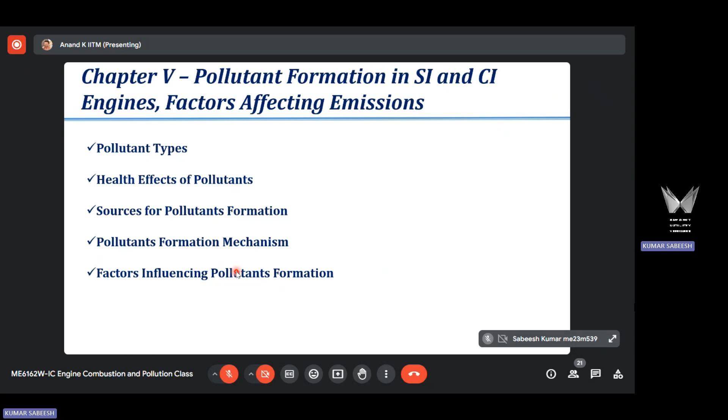They are also called regulated pollutants. We need to reduce the concentration of these pollutants emitted into ambience because they create health effects. So we have so far discussed the factors that affect pollutant formation in spark ignited engine. In the last class, I started my discussion on the factors that affect pollutant formation in CI engine, compression ignited engine. I will continue that now - these are the variables, engine design and operating variables that affect pollutant formation.

Design variables need to be carefully optimized when designing the engine. In a compression ignited engine, we have to control four regulated pollutants: NOx, particulate matter, HC and CO. In NOx, we have both NO and NO2, unlike SI engines where NO2 concentration is negligible. Here it can go up to 30%. So we need to control these species emitted from the engine.

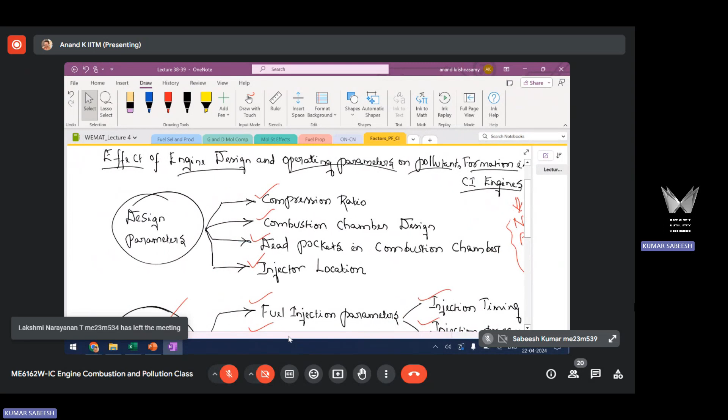That's why we need to look at the variables that have an influence on these pollutants, so as to carefully optimize them such that pollutant levels are less in the engine. That is our objective. When we analyze the effect of these variables on pollutant formation, we have to recollect the mechanism involved in forming this pollutant, which we have already discussed. We need to relate how a particular variable affects the mechanism for a particular pollutant. That is how we analyze the effect of these variables on pollutant emission.

When you talk about compression ratio, it's an important design variable. As we know, it affects performance as well as pollutant emission. Here we are looking at how it affects pollutant emission in a typical diesel engine. Compression ratio, for a CI engine, varies anywhere between 14 to 22. That's the normal compression ratio range for a CI engine. We need to carefully fix a particular number based on a given CI engine.

CI engine is most versatile, as we have seen. You have a large application segment for CI engines. Based on the type of application and type of CI engine that we handle, we need to carefully optimize this. Now let us look at how this affects pollutant formation.

Let us consider that we are increasing compression ratio. If we increase compression ratio, what effect will it create on the combustion process?

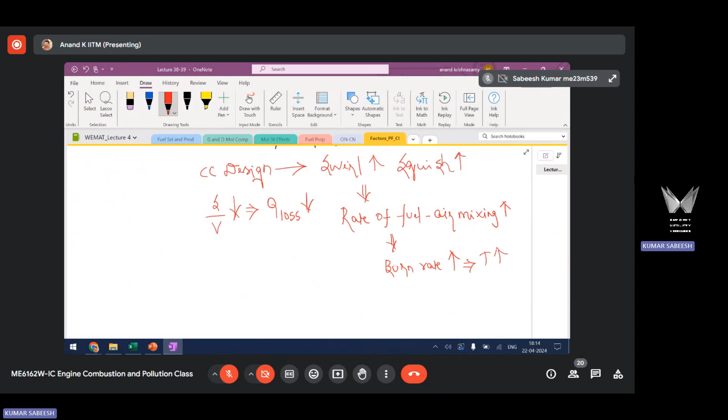When we talk about heat loss here, we are talking about wall heat transfer losses - that is the heat loss from the engine cylinder to the coolant. It's also called wall heat transfer loss, and it's a function of surface to volume ratio. So when you reduce surface to volume ratio, heat loss is less. When heat loss is less, what happens to in-cylinder temperature? It goes high.

So you can see that the overall objective of combustion chamber design in a CI engine is to increase the burn rate and increase mixing - that raises the temperature. You also retain a lower surface to volume ratio from the perspective of increasing thermal efficiency and reducing heat loss - that will also increase temperature.

So this rise in temperature in the cylinder will reflect in the primary pollutant levels. NOx, or NO, will increase - thermal NO will be high. What about the other pollutants? What will happen to soot? It will decrease, because oxidation will also increase. It will decrease for two reasons - one, improved oxidation with higher temperature.

Any other effect because of better mixing in terms of soot formation? Can I say fuel-rich regions reduce due to better mixing? So you are increasing swirl and squish - this results in better air fuel mixing. Can I say that this will reduce local rich regions? Yes - so the overall effect will be fuel-rich regions are less, temperature is high.

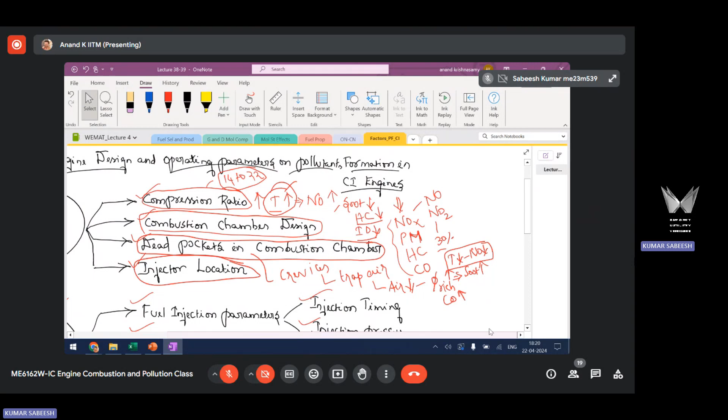The other design parameter which is relevant only for CI engine application is injector location. When I talk about injector location, you can locate the injector in different ways. I will show you 4 possible ways wherein you can locate the injector. So this is one option.

So you can mount the injector with any of these options. Option 1, you are mounting the injector along the axis, so it is a centrally mounted injector. Second one, you have an offset injector - injector is away from the axis, that is case 2. Case 3, it is centrally mounted, but you have an angle.

Now, among these 4 options, which one will you prefer and why? I'm posing this question to you - which one will you prefer and why? Option 1 is preferable, sir, for the spray cone angle to be sufficient. So all of you agree that option 1 is preferable?

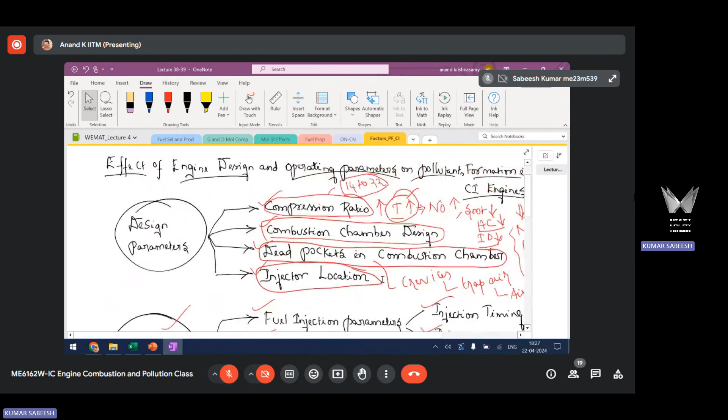Okay, so next we are checking the operating variables. You have 4 important operating variables in a diesel engine. Among these, I would say option 1 is the most important variable. Load and speed are out of your control. You need to run the engine based on different load and speed.

But the first one, you need to carefully optimize. This operating variable needs to be optimized dynamically when you are running the engine. That's why you need a closed loop control system in place. This system will get signals from the sensor and has to dynamically optimize the injection parameters such that the primary pollutant levels are less in the engine.

Two important injection parameters are: one is fuel injection timing, and the second is pressure. These two are controllable if you have an electronic injection system, and cannot be controlled if you have a mechanical system. Mechanical systems don't have any flexibility in varying the injection parameters. That's why we need CRDI, Common Rail Direct Injection System.

Almost all on-road vehicles use CRDI systems. We don't use mechanical systems, except in off-road stationary diesel engines. We generally go with flexible electronic injection systems in diesel engines, which means you can vary the timing and pressure.

Now let us look at the effect of injection timing and pressure on pollutant levels. When I talk about timing, you have 2 options, with respect to TDC, where you are spraying the fuel. You can either spray it far away from TDC, which is advanced injection timing, or closer to TDC, which is retarded injection timing.

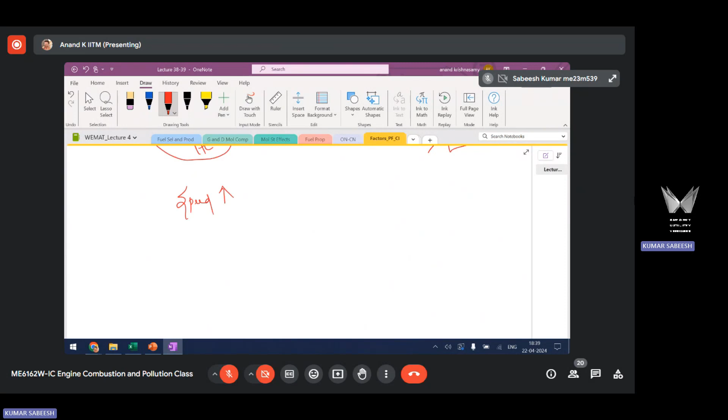Next we have speed. When I say I'm increasing speed, basically the turbulence level in the engine will be more. Swirl and squish air motion inside the cylinder is going to be higher. So higher the engine speed, turbulence increases, it's a function of engine speed. So air motion in terms of swirl and squish is going to be high. This will reflect in higher burn rate because it reflects in better mixing.

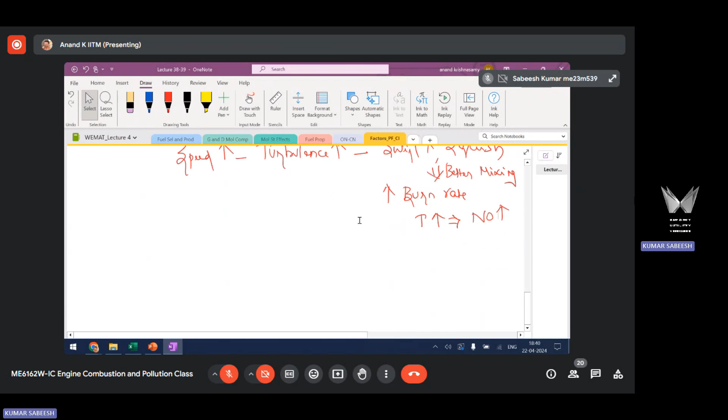Higher burn rate means the temperature will increase at higher speed. Higher temperature will reflect in NO, high levels of NO. Higher temperature will also improve oxidation rate of soot, CO, and HC, so they may come down. But you should also note that with increase in speed, the time available for all this will come down. Engine running at higher RPM means engine cycle time will be less, so the time available for oxidation of HC, CO as well as soot will come down.

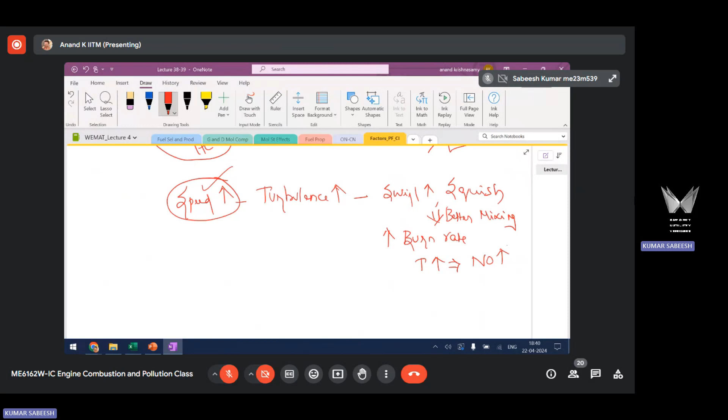So there are two contradicting effects here with speed: the time is less, the temperatures are high. Due to high temperature, the oxidation rate is high. So the overall final value of HC, CO or soot is dependent on the magnitude of the speed. But NO you can say is going to be high with increase in speed because of better burning and higher temperature.

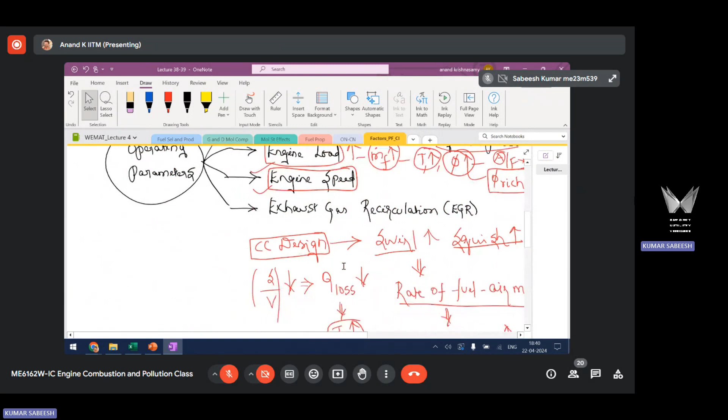Next we have exhaust gas recirculation. This can also be optimized. I will talk more about exhaust gas recirculation in the next chapter when we discuss pollution control. What we are doing here is recirculating a fraction of exhaust gas back into the intake manifold. This is exhaust. So you are recirculating exhaust gas. This is the intake manifold, this is the exhaust manifold. So when I say I'm recirculating exhaust gas, I'm tapping a fraction of the exhaust gas from the exhaust line and sending it back to the intake line.

In the intake line of a diesel engine, you are inducting only air, and fuel is sprayed inside the cylinder. So exhaust gas is mixed with air and sent into the engine cylinder. Now if this is the case, what will be its effect on the combustion phenomena? Two important effects: one, temperature will come down; second, oxygen will come down. Oxygen comes down due to the displacement effect, because exhaust gas is displacing a considerable fraction of air in the intake system.

That's why you have less air going into the engine. This is the displacement effect or dilution effect. Oxygen levels will come down. Temperature will come down because of the constituents of EGR, exhaust gas. You primarily have CO2 and H2O, complete combustion products in the engine. These are triatomic gases with high specific heat. When the specific heat is high, the temperature will come down. This is called the heat sink effect. It won't allow the combustion system temperature to rise. The higher specific heat component will absorb the heat and won't allow combustion temperature to rise. That's the reason for the drop in temperature. So this is the overall important effect of recirculating exhaust gas into the intake manifold. Now you can comment on what will happen to the primary pollutants.

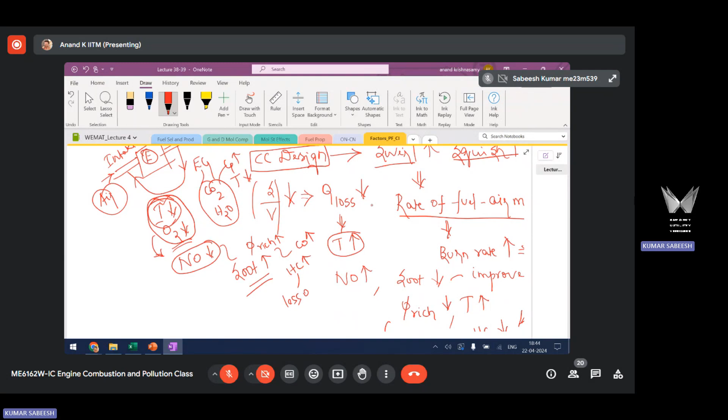But there are other effects. Soot will be high, there will be a trade-off, because for the same reason of less temperature and less oxygen, the oxidation rate of soot will be less. Less oxygen also means fuel-rich regions increase inside the cylinder, so soot will be high with exhaust gas recirculation. For the same reason, CO is also high because of insufficient oxygen in the cylinder. Similarly, HC will be high primarily due to the temperature effect - lower temperature means less oxidation, and less oxidation leads to high HC levels. So this is the effect of exhaust gas recirculation: by recirculating exhaust gas, you effectively control NO level, but the other three primary pollutants will increase.

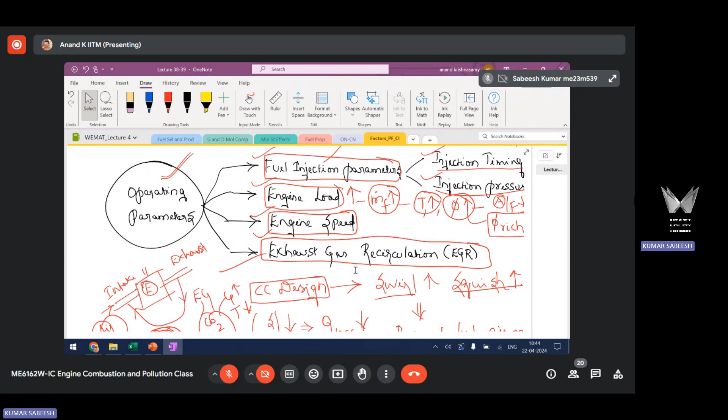This is similar to valve overlap in the SI engine, right? Yes, I will talk about valve overlap in the next chapter. A similar effect is there - by retaining residual gas, whatever effect you have, the same effect will be there when you recirculate exhaust gas. In fact, residual gas and exhaust gas are the same product, combustion product. You have different terminologies based on how it is retained in the cylinder.

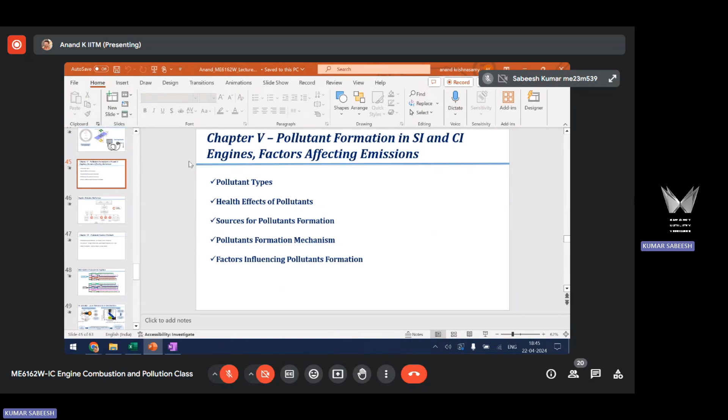So with this, I conclude chapter 5. Now I am moving to chapter... chapter 5 is concluded with that. Now we are moving to the next chapter in the second module, chapter 6, which is about pollutant control methods.

These are the contents we are going to discuss in this chapter. So far in the previous chapter, we discussed the mechanisms involved in forming primary pollutants and the factors that influence pollutant formation, primary pollutant formation, in SI and CI engines. Now with that understanding, we are going to look at the available control methods. This is very important to learn because you need to control the pollutant level below the legal mandate. There is an emission mandate which is a legal requirement, otherwise you cannot sell the vehicle on the market. Any new vehicle cannot be launched until the legal emission requirements are met. So we have to control the pollutant level below the legal limits, and we should be familiar with the control methods available. Before we discuss control methods, it's very important to learn the mechanisms upon which the pollutants are formed and the factors that affect or influence pollutant formation.

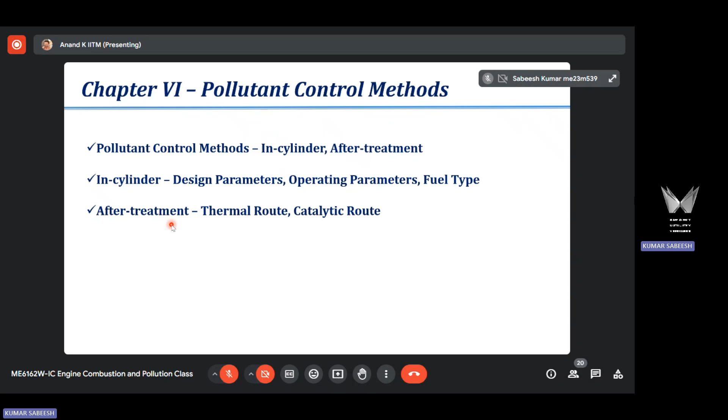So with the understanding of those mechanisms and factors, we move to looking at the control methods. These are broadly classified into two types: one is called in-cylinder method, the second is after-treatment method. In-cylinder method targets reducing pollutant level in the cylinder itself - as the name implies, we reduce pollutant levels inside the cylinder. Whereas in after-treatment control, we don't bother about how much pollutant is formed in the cylinder; rather, we control the pollutant level in the tailpipe or engine exhaust pipe. Pollutant concentration is reduced in the tailpipe before the pollutants are let out into the atmosphere - that's why it's called after-treatment. You are not controlling the formation of the pollutant, rather you allow it to form, and after the pollutants are formed, you control it. So I will give more detail about the available in-cylinder control options and after-treatment control options to reduce pollutant levels from SI engines and CI engines. This is what we are going to look at in chapter 6.

Before we discuss in-cylinder and after treatment control methods, let us have a quick look at the exhaust gas condition. It's important to know the exhaust gas condition in SI engine and CI engine before we talk about these controls, especially for after treatment control, where it's important to learn the difference between the exhaust conditions in SI engine and CI engine. That's why I'll give an overview of exhaust gas condition before discussing control methods.

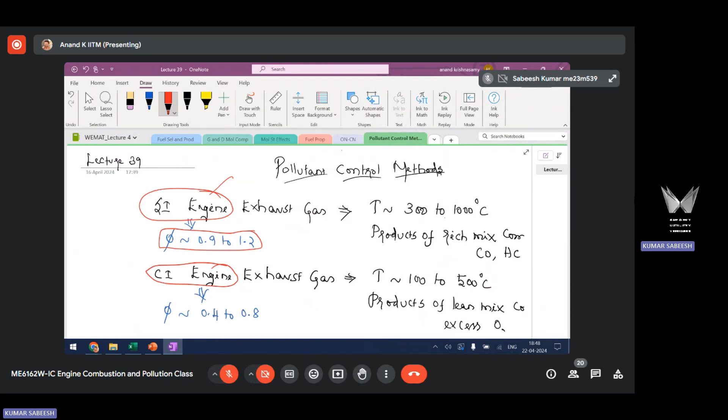In a spark ignited engine, the operating phi range is 0.9 to 1.2, so you are close to stoichiometry or slightly rich. Because of this, you will have products of rich mixture combustion as you go up to 1.2, such as CO and HC. We discussed in chapter 2 the thermodynamic aspects of combustion and what products form at different phi values. Under rich mixture combustion, you will have very high CO level and very high HC level, since HC is representative of unburned hydrocarbon. You get more unburned emission and CO emission because of insufficient oxygen with rich mixture.

And the temperatures are going to be very high compared to CI engine. You could see that they reach 300 to 1000. When will it be 300, when will it be 1000? I'm talking about exhaust gas temperature. This is at no load and full load - this is at low load, and this is at full load.

Based on the load, the quantity of mixture that you burn in SI engine is going to be different. We control that using a throttle valve, so by regulating the quantity of mixture using the throttle valve, you are controlling the quantity burnt in the engine, which reflects in the combustion temperature and also the exhaust gas temperature. It varies anywhere between 300 to 1000 - this is the normal or nominal exhaust gas temperature range for any given spark ignited engine, along with products of rich mixture combustion. This is the typical condition of SI engine exhaust gas.

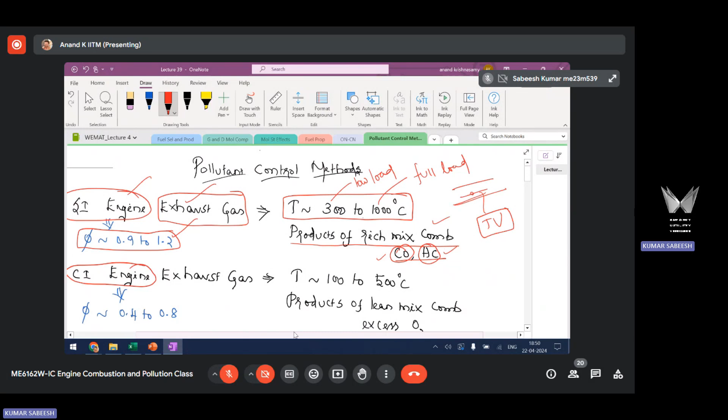It is insulated. Sir, is the temperature of 1000 degrees inside the cylinder? No, I am talking about exhaust gas temperature. Sir, tailpipe or in between the process areas? Tailpipe. If you do experiments with an SI engine, you can easily measure this temperature using a thermocouple fixed in the exhaust line at the tailpipe, and you will get these numbers.

So we are basically looking at the exhaust gas condition primarily from the perspective of after treatment control. A typical SI engine exhaust gas will be at this temperature range, and it will have more products of rich mixture combustion like CO and HC. These are the typical SI engine exhaust gas conditions because of the operating phi range from 0.9 to 1.2.

Now let's look at CI engine exhaust gas conditions. The CI engine runs with a phi value of 0.4 to 0.8, always less than 1 - it's lean combustion, and we use up to 30 to 50% excess air, meaning more than stoichiometric proportion of air. So since phi is less than 1, you use high excess air, and because of that the operating temperatures are less, and exhaust temperatures are also less. It varies from 100 to 500.

Again, this is at no load, and this is at full load. So this is the nominal or normal range of exhaust gas temperature for a typical CI engine, and it's considerably less compared to SI engine. The difference comes due to the operating phi range - operating temperatures are high in SI engine and less in CI engine because of excess air, and you will have products of more lean mixture combustion, with excess oxygen appearing in the engine exhaust. So CI engine exhaust will contain more lean products, SI engine exhaust will contain more rich combustion products, and the temperatures are considerably different.

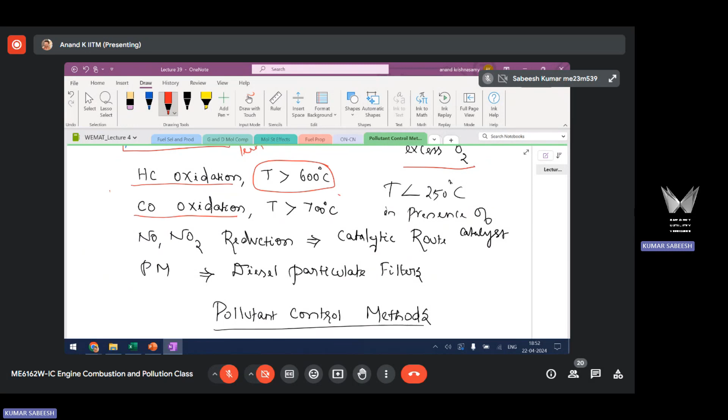Now, to reduce HC in the tailpipe, you have to oxidize it - the typical temperature requirement is above 600 degrees Celsius. CO oxidation requires even higher temperature, around 700 degrees Celsius. You can see that 600 and 700 are never reached in a typical normal CI engine operation, where the gas temperature is around 500 at max. In SI engine, it is possible under certain operating conditions.

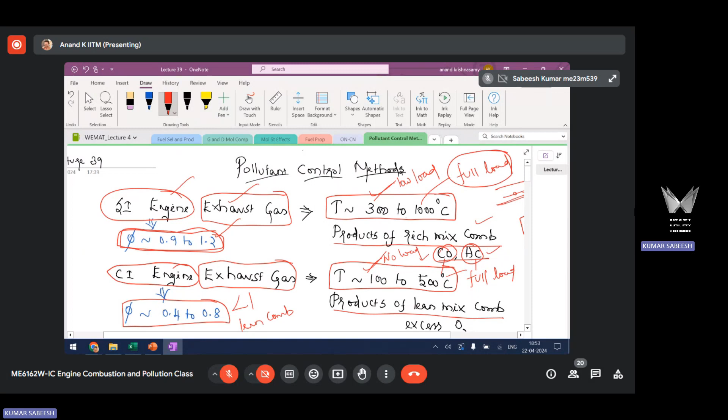When you move towards full load, it's possible to reach higher temperature, meaning you can oxidize HC and CO in the tailpipe also. But this is not possible in a CI engine.

But in presence of a catalyst, if you have a catalyst-based control system, the temperature you need is less than 250 degrees Celsius. This is one of the most effective methods of controlling HC and CO. You need to use an appropriate catalyst because it considerably reduces the temperature requirement for oxidizing unburned hydrocarbon and CO. So HC is oxidized to H2O and CO2, and CO will be oxidized to CO2 in presence of a catalyst. Even at a lower temperature, up to 250 degrees Celsius, you can effectively bring down HC and CO. So this is one of the most effective methods for controlling HC and CO. Otherwise, you need a high temperature, which is not possible to achieve in a CI engine.

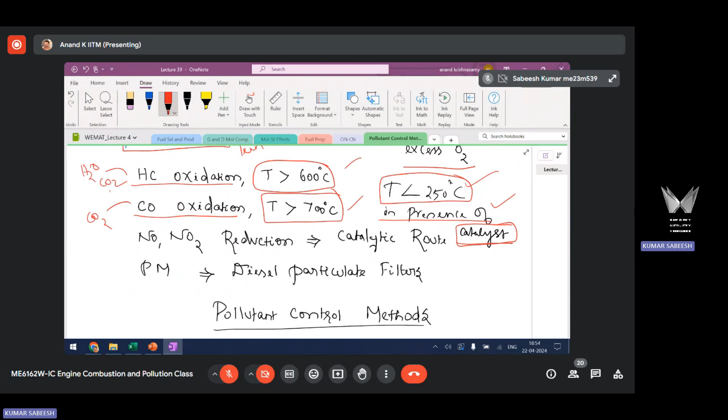In SI engine, it is possible under certain operating conditions. For NO and NO2, you have to reduce it. So HC and CO has to be oxidized, while NO and NO2 has to be reduced to nitrogen before it is let out into the atmosphere. So it's a reduction process, while HC and CO is an oxidation process. For reducing, you have to follow the catalytic route only. You cannot follow the thermal route, meaning there is no point talking about oxidation of NO or NO2 here. It's about reduction of NO and NO2 to nitrogen. So for reducing it, you need a suitable catalyst again. You have to follow a catalytic route, use an appropriate catalyst, and reduce NO and NO2 to nitrogen before the gas is let out into the atmosphere.

For particulate matter, since it's mostly a solid particle, and the solid particle carries liquid particle as we discussed already in the composition of PM, you have to filter it. What you need is a filter to nano size, or based on the PM size, you have to use an appropriate filter to remove the particle and let out clean exhaust gas. So don't let out the soot-laden exhaust gas into atmosphere. You filter it out using a diesel particulate filter and let the clean exhaust gas go out of the engine. So what you need is a particulate filter for removing PM.

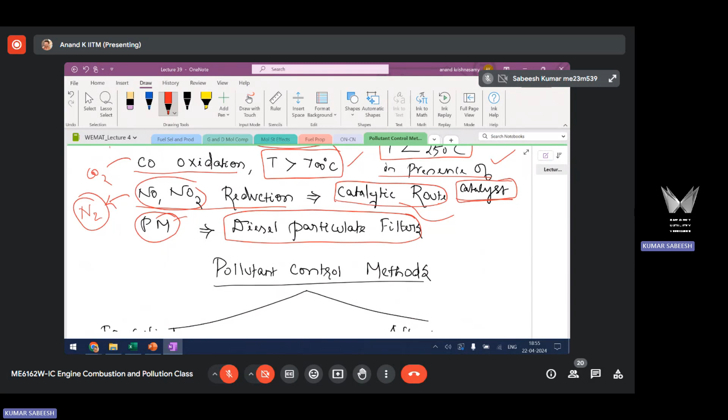For NO and NO2, what you need is a suitable catalyst to reduce. For HC and CO, what you need is a suitable catalyst to oxidize. So these are the exhaust conditions, and this is how you need to reduce the concentration of these primary pollutants. It's time up, I stop here. If you have any questions, I can take your questions.

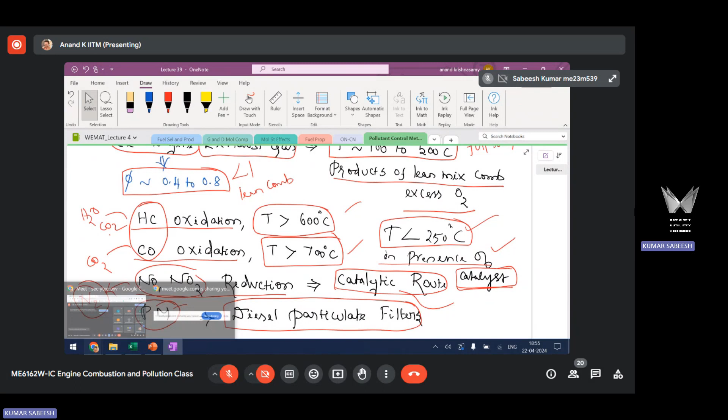Student: For particulate matters, so the filter, when it filters down, the residues will remain within the engine's tailpipe itself, sir? Teacher: Yeah, it's going to remain. There is something called regeneration. I will give more detail. What I have given now is just an overview.

Once the particulate filter is loaded with the particles, you have to periodically remove it. That process is called regeneration. Otherwise, it is going to create back pressure in the exhaust, which is going to increase the fuel consumption. So you have to clean the DPF once the load reaches a threshold value.

Student: Sir, in any case, when we are having a filter on the tailpipe for the particulate matter, still it will create a bit of back pressure for the exhaust? Teacher: It's going to create back pressure, definitely. It's one of the shortcomings of this. It's going to create back pressure, but it is not so high with a clean filter. So they will carefully design it, because this is one of the important considerations, pressure drop in the exhaust line. When they design the DPF, they will carefully design it in such a way that pressure drop is not so high, otherwise you will have the problem of higher fuel consumption in the engine.

Student: And how about the regular cleaning of these filters? That will be just like periodical maintenance or replacement? Teacher: Yeah, periodical maintenance, periodical regeneration. You need to have a closed loop sensor control system. You have to monitor the pressure drop carefully. Once it reaches a threshold value, the regeneration process will start and the filter will be cleaned. Student: Understood, sir. It will run automatically based on... Teacher: Yeah, it is an automated process. Student: Understood, sir. Clear, sir. Thank you, sir.